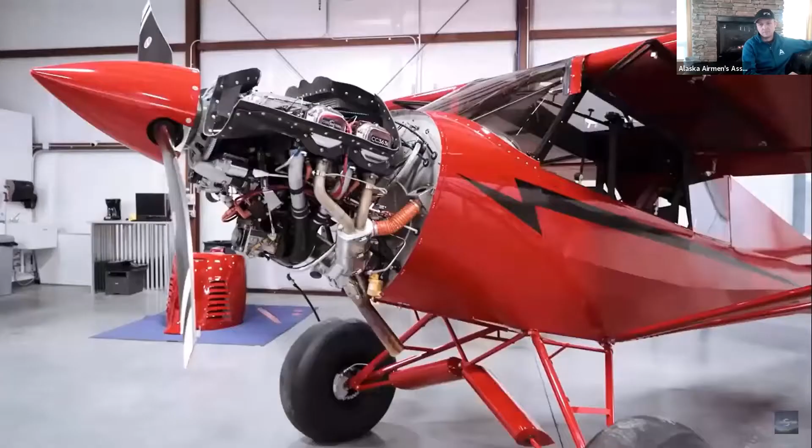The FX3 really takes the best of the Carbon Cub and the best of the X Cub and kind of meets in the middle. Faster than a Carbon Cub, more off-airport STOL capability than an X Cub. My estimation, the EX3 FX3 is probably the best airplane Cub Crafters has ever built. You have an engine that puts out more thrust, a constant speed propeller which allows you to climb the airplane really hard. The Hartzell Trailblazer propeller allows you to manage the engine much better than a fixed pitch propeller would. You can turn up to 2,700 RPM on takeoff, getting full rated horsepower, turn the RPMs down in cruise for better efficiency and quieter cruise.

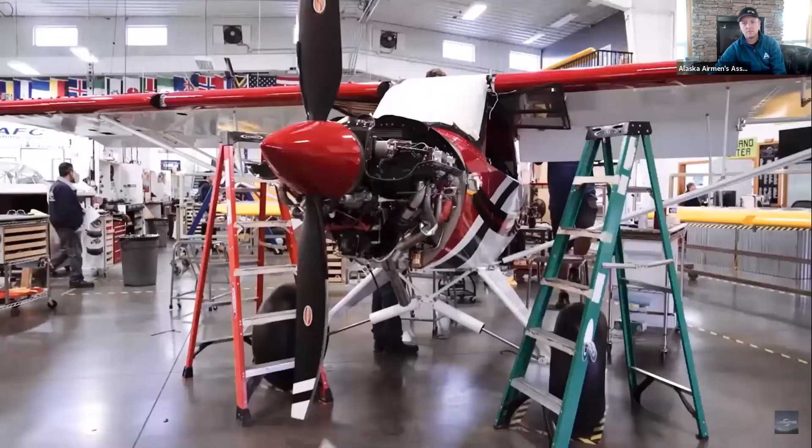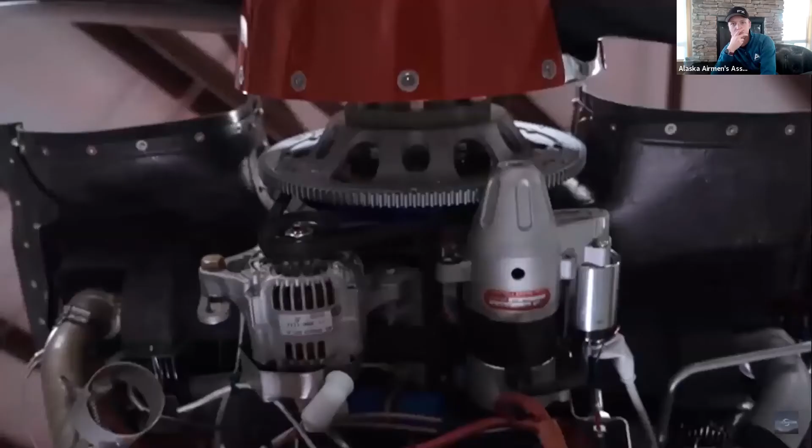The engine needed to be capable of not only supporting the constant speed prop, but we also wanted to take the technology improvements that were available in our third generation. We worked with Precision Airmotive on the fuel injection system, electronic ignition. We worked with the folks at Lightspeed. We also developed our own proprietary cold air induction system. We built a carbon fiber plenum intake. We designed in SolidWorks, and through the flow testing, we could get it to where it flowed equal amounts into all four cylinders. Comes back to the state-of-the-art components that we're building to put in this airplane that makes it better than other aircraft.

The first flight I had with that 363i engine was quite eye-opening. The acceleration made quite an impression. The control response for the FX3 and EX3 is considerably lighter. The stick on the FX3 I prefer over the FX2. I think the pistol grip that comes with FX3 is a real improvement. Weight and weight savings was important through the design process, and every part of the airplane was looked at. The fuselage, the wings, the tail, all of the major structure was analyzed for the higher speed ratios because the airplane performs at a higher speed.

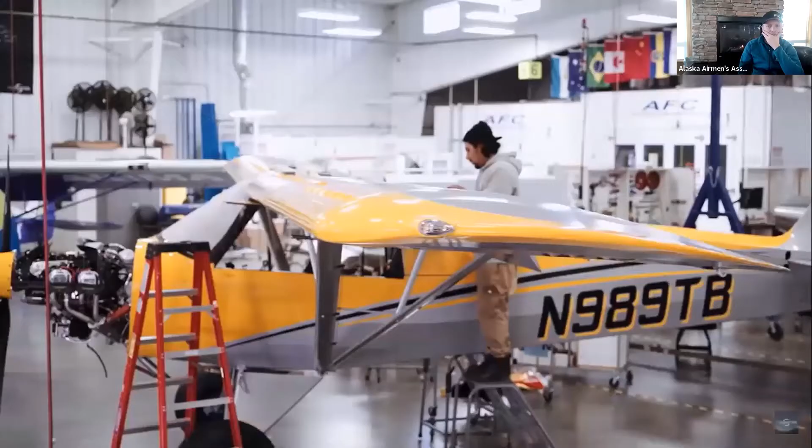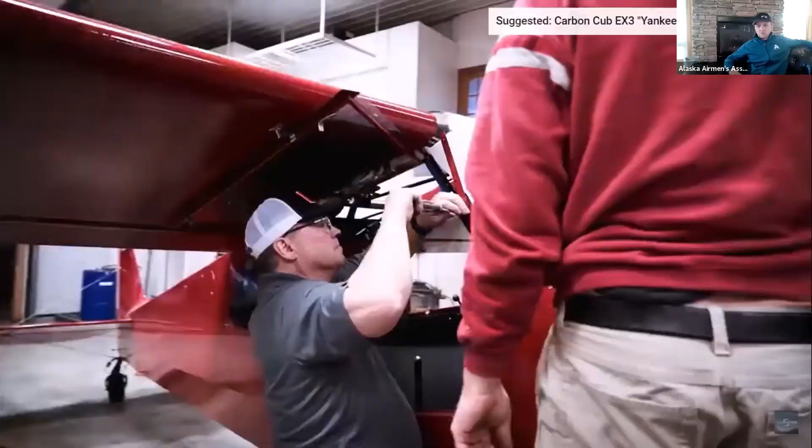So we have an impressive capability to carry 900 plus pounds with an aircraft that has the highest thrust to weight in its class, which brings absolutely exhilarating performance. The FX3 and the EX3 are identical aircraft. The difference is that the EX3 kit is built 100% by the customer. The FX3 is a builder assist aircraft.

All of the Carbon Cubs are very docile in the stall. In my mind, they're just an honest aircraft. The Carbon Cub FX3 is my favorite airplane that Cub Crafters makes. Best all-around speed and STOL capabilities of any model that we make. Okay, a couple of videos here to showcase the FX3 in action.

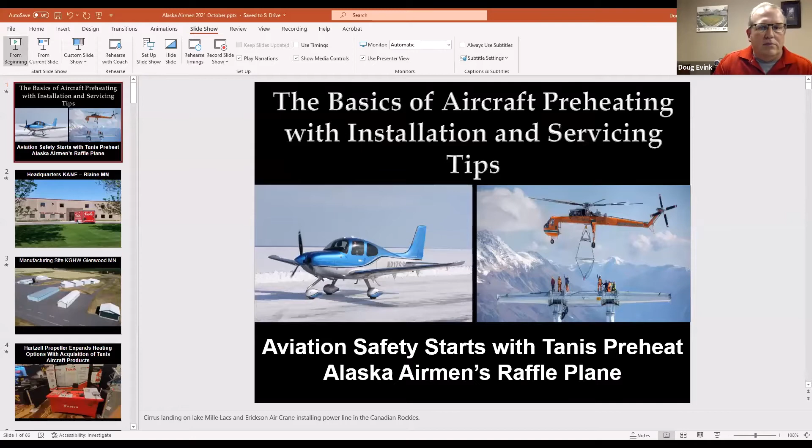So the basics of aircraft preheating, along with some of the installation and servicing tips. The Cirrus that you see on the left-hand side of the screen there, that is a lake in the middle of Minnesota called Mille Lacs. After all the ice houses get pulled off when they need to be off at the end of February, a resort and a bunch of volunteers plow a runway. Last year it was a little over a mile long, and we call it Ice Port.

And then on the right-hand side, we not only preheat piston aircraft, but many turbines, tons of helicopters. And this is the Erickson Air-Crane that we fitted with one of our systems, that's actually in Canada, putting in the Trans-Canadian high voltage power line.

So a little bit about Tanis. Tanis Aircraft Products has 2 locations in Minnesota. Welcome from the lower 48, as those up in Alaska always like to say. This is our Blaine location, where our sales, engineering, and accounting really happens. Where the phone rings, this is where the emails get answered.

And our manufacturing facility is in Glenwood, Minnesota, where it's been for going on 30 years. A nice little small airport over there that if you get the chance, stop on by. We always have goodies to give people that walk in through the AD building in Glenwood, Minnesota.

Most recently, if you haven't heard or seen via the press releases, as of July 1st of 2021, Tanis Aircraft Products is now part of the Hartzell Heated Products family of brands. Hartzell Propeller purchased Tanis on July 1st. And along with that, we became part of the Hartzell brand of companies. And you may not have heard of Tailwind Technologies, but that's the holding company. Hartzell Propeller, a company over 100 years old.

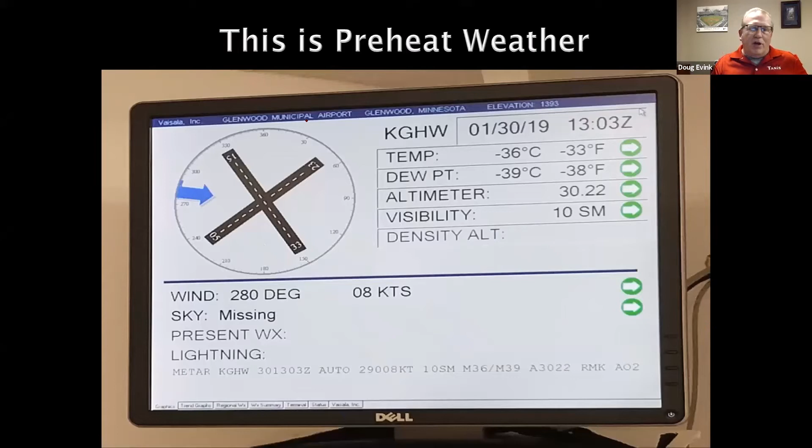This is the picture of our weather station in Glenwood, Minnesota back in 2019, minus 36 degrees. Good news, the dew point at minus 39, at least there's not much humidity in the air, but we call that Tanis preheat weather. And truthfully, what we really want to convey to you, whether you have a Tanis preheat or any type of preheating system, is why are we talking to you about preheating? And of course, Alaska is really in the middle of our strike zone when it comes to customers that need our product. We do it to reduce the engine wear, increase the engine life.

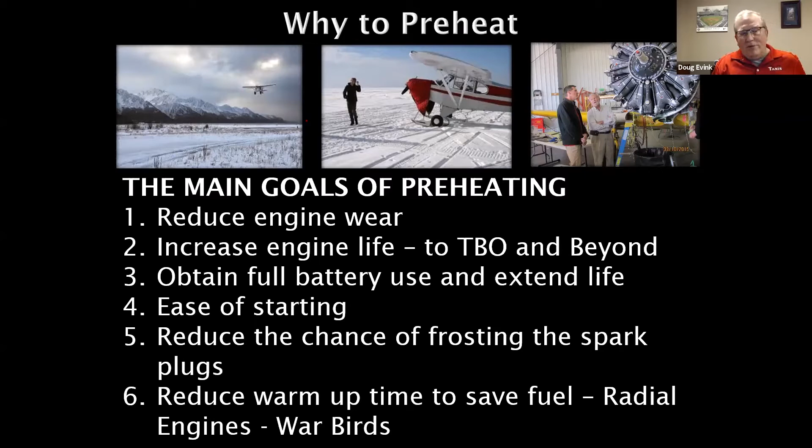Many batteries now are not forward of the firewall, they're after the firewall. So we have battery heating that heats up that battery. You want to be able to start it. You want to make sure if you're in a flight school and you got a new pilot that hasn't really figured out how to start it in colder weather, you don't take that chance of frosting the spark plugs. And we even see a ton of use of our product in open cockpit and warbirds because of all the oil that's in there that has to get up to temp prior to flight.

Prevents cylinder scoring. As we know, there's a taper in the cylinder, and the dissimilar metals of the air-cooled aircraft engine expand at very different rates. And just because you have oil pressure doesn't mean you have oil flow. So that's another reason why you want to preheat. And we recommend preheating all the critical driveline components, if you heard Brad talking about a constant speed prop and accessories that might be involved with that. It truly does increase safety, and that's why Tanis' tagline is aviation safety starts with Tanis Preheat.

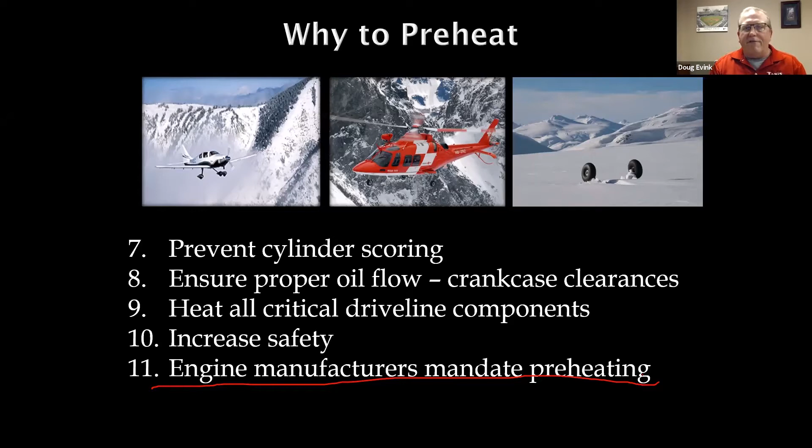And last but not least, the engine manufacturers do actually mandate preheating at certain temperatures. If you look at Lycoming or Continental's handbook, they go at it a little bit differently, but if your engine is at 20 degrees F, in that 20-degree area, they say you must preheat prior to starting that aircraft. So this is Tanis related.

What are our goals when we design a preheat system for an aircraft engine or an airframe that we've never dealt with before? First and foremost, we want to make sure that we're able to heat those cylinders. It's a multi-point preheat system. We want to be able to heat the cylinders at least 50 degrees above the ambient and produce an oil temperature at least 40 degrees above the ambient. But when you're externally warming up your oil, you don't want to have it exceed 120 degrees Fahrenheit. And never do we want to have it warmer than the cylinder.

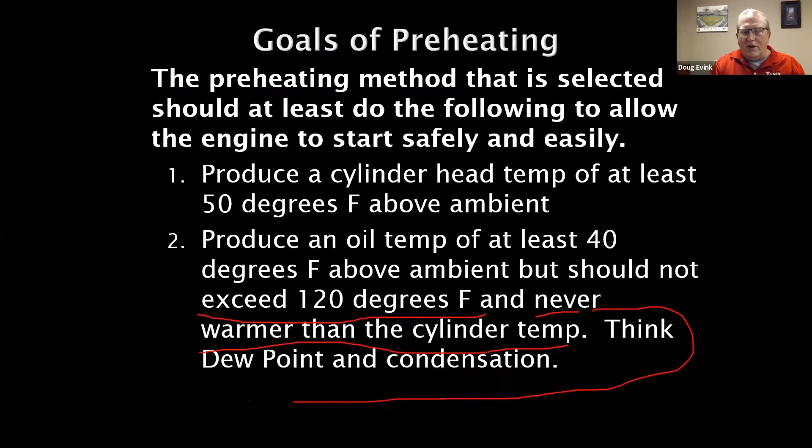And I'm going to jump into a little physics here about the dew point and condensation. So we have a caution, here comes physics. But if you think about your oil sump, when you're done flying, that crankcase is full of moisture. It's almost 100% relative humidity and probably close to 180 degrees. That moisture will all condense, sit on your oil, eventually go down to the bottom. That water will evaporate due to just the normal physics around it.

But as you increase the delta between the temperature of your oil or the water and the dew point inside your aircraft crankcase, that rate of evaporation will speed up. And that's the critical part.

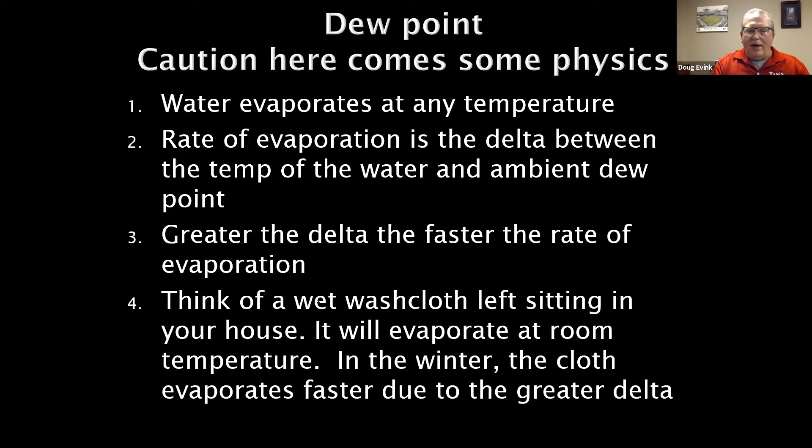You know, think of if you're in Alaska or even Minnesota, you leave a wet washcloth sit out in the summertime, high dew points, it stays wet for a day or two. In the wintertime, when we're heating and the dew point and the humidity in our house drops quite a bit, it is dry in no time. And that's that evaporation rate that speeds up.

So we have a multi-point preheat system that heats everything above the oil line warmer than the oil. So whether you have 4 quarts or 7 quarts or anywhere in between there of oil, we want to make sure everything above that is warmer than the oil, which of course is also the water and the moisture that's entwined with your oil. And that is a physical constant. You cannot condense moisture on a piece of metal that is warmer than the dew point.

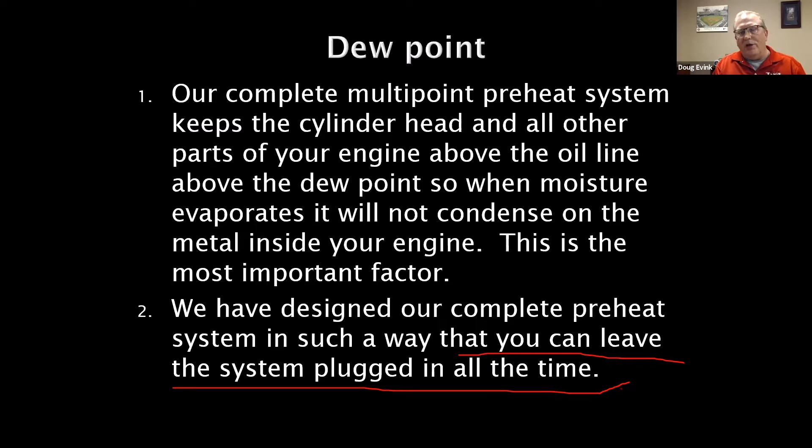And that's really the reason why you can leave our system plugged in all the time. And we'll talk about it as we go through the next 45 minutes here in the presentation, what you should or should not do. But that is the meat of what our presentation really wants to do. Why should you preheat, what you should preheat, and why it's so important you think about that temperature of the engine.

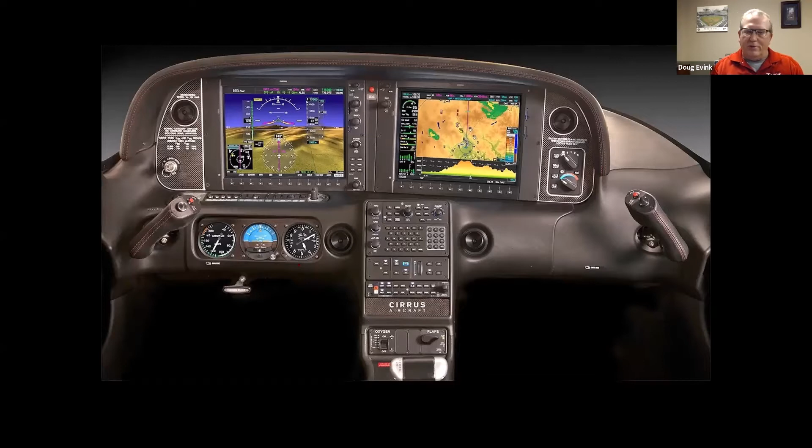The minute you slip that master on, you're going to be able to tell what your CHT temperatures are and what your oil temperature is. So you can see that delta, and you can also see, hey, do I want to start this engine now when my oil is this temperature or when my cylinders are this temperature?

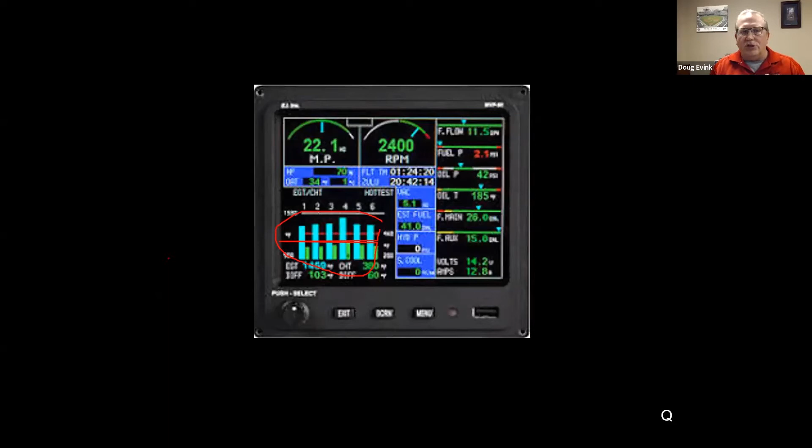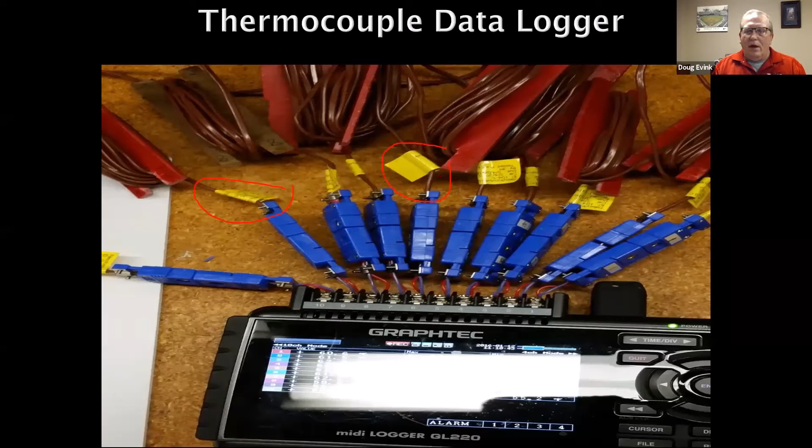I give you that information because what we want to prove to you is we are gathering this data all the time. This is our NIST calibrated data logger that we use to capture temperatures of various engines. You see these are the calibration labels on each one of these items. And we actually physically go out to customers' aircraft and do these tests. So this is a customer that we went to.

It was a flying club with several different aircraft, and we did a mapping by taking those thermocouples, you see these brown wires here, and embedding them up against the outside of the cylinder, opposite of where we're heating the cylinder, putting ones on the case inside the oil. So the bunch of 100-mile-an-hour tape you see there, that's one that has our thermocouple sitting inside of the oil so we can get the oil temperature. And then we'll also do the ambient temperature at the same time.

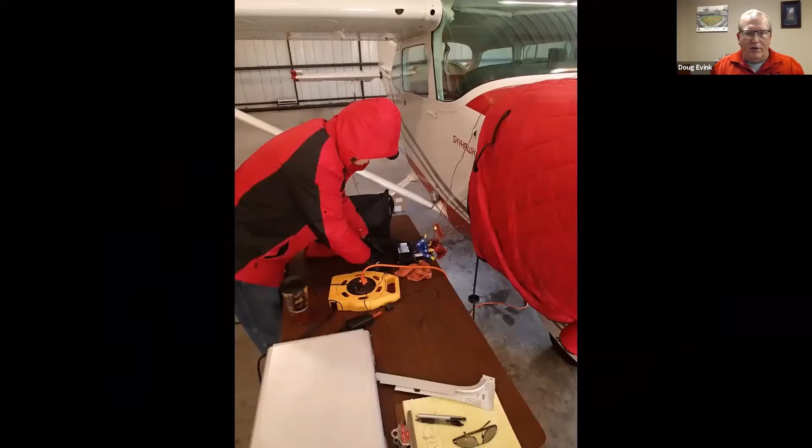And yeah, it's in a hangar and it's cold. I don't remember what the temp is here, but we do it with engine covers on, engine covers off, cowl plugs in, cowl plugs out, always gathering this data so that you too can actually see how we're gathering that data, and you can prove this out yourself. You can actually take a look at it and say, here's how it's happening.

So here, let's jump into some of this data. This should be near and dear to one of the people that are on this webinar tonight. This is an FX3 that resides in the metropolitan area, the Twin Cities of Minnesota. Got a kit put on. Oh, I don't have the date on here, so Trent, you'll have to chime that in.

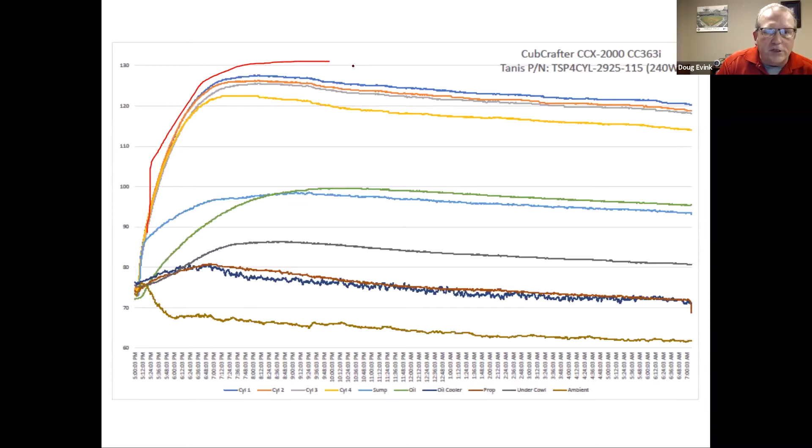But you'll see what we're talking about. We want all 4 of these cylinders to be warmer than the oil, and the oil is the green line right here. So this is the oil, and of course, it's going to take longer to heat up the oil than the cylinders because it's got more mass. And we really want to see this delta every time.

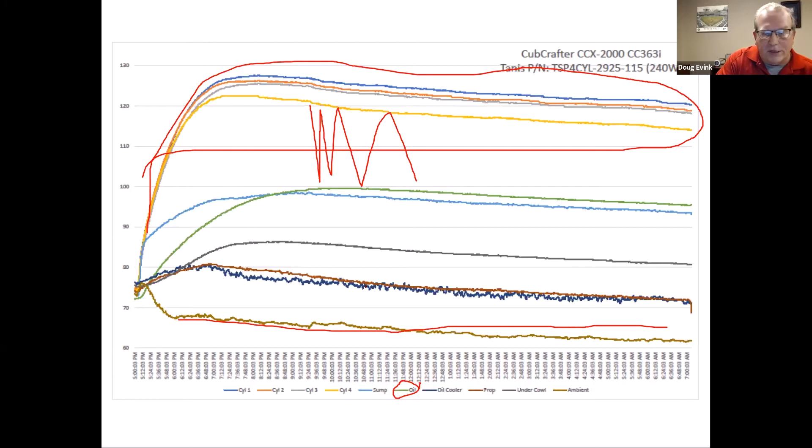And we want to make sure the temperature is in a range that we feel comfortable to start the aircraft. And if you see here, we're starting this with ambient temperature in the 60s. So yeah, you can preheat in the 60s. The oil temp isn't above that 120 where we don't want to see it. But that is how we gather and capture data on customers' aircraft.

We'll talk a little bit more about what if it is 20 below zero and you need that extra heat. So that's the other reason you don't want to put a timer on it or a thermostat inside your hangar that says, hey, every time it gets into freezing, I start preheating, and then once it gets above freezing, it shuts off. Because what's going to happen is our cylinders, so you see right here at the 1.5 hour mark, we get 50 degrees above ambient in that first 1.5 hours.

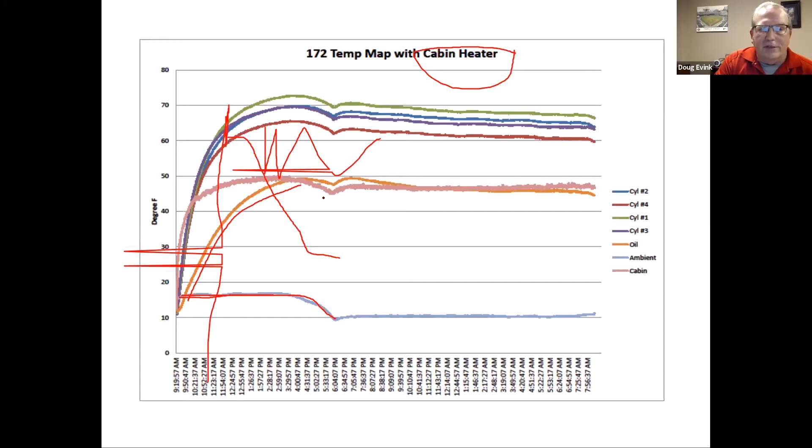But if we were to unplug it, those cylinders are going to be the first ones to cool off because they have less mass, and the oil is going to stay warmer than that. And now you set yourself up again for a condensation possibility. Again, not a concern if in fact you're going to fly it right away, but if it sits there for many, many days, now you have an issue of condensation on a rocker cover to start with, valve, top of my cylinder, cylinder walls, and then starts the issue.

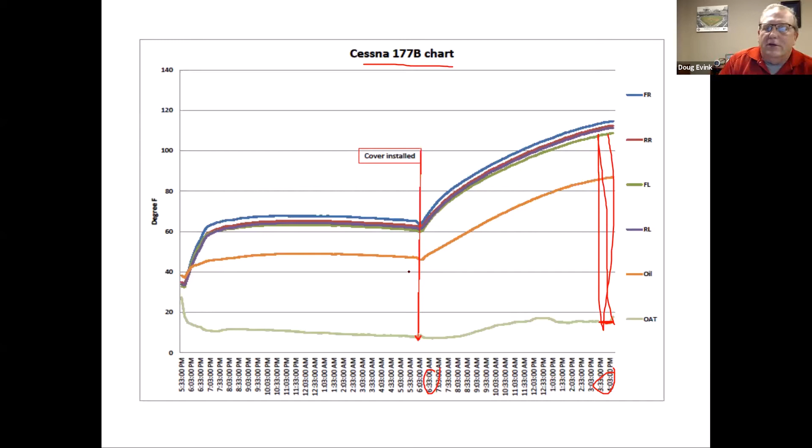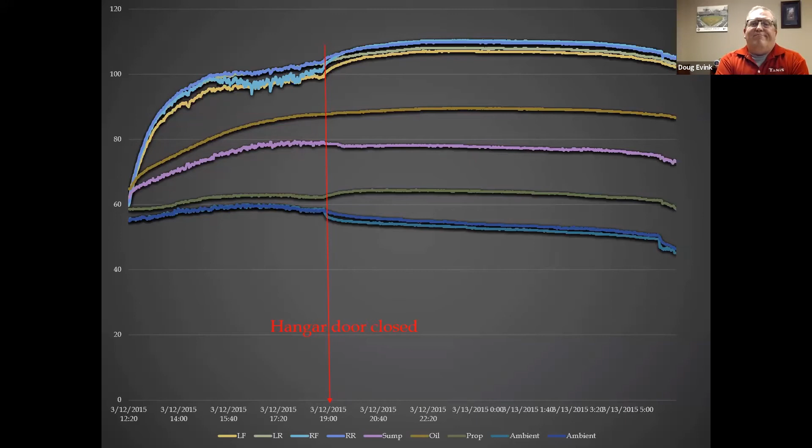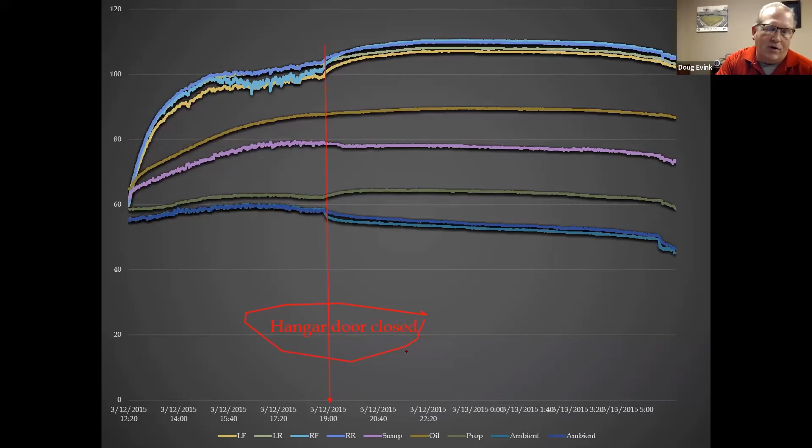And sometimes you're doing a data log on something and you bring the data back into the office and you look at it and you say, what the heck is going on here? Of course, it didn't get printed out when we looked at it with this on the side of it. This was a flight school that tucks in about 10 aircraft every night, big hangar door. And they tucked this one in. We started the data logging at 12:20. And then at about 7 o'clock that night, the hangar door goes closed.

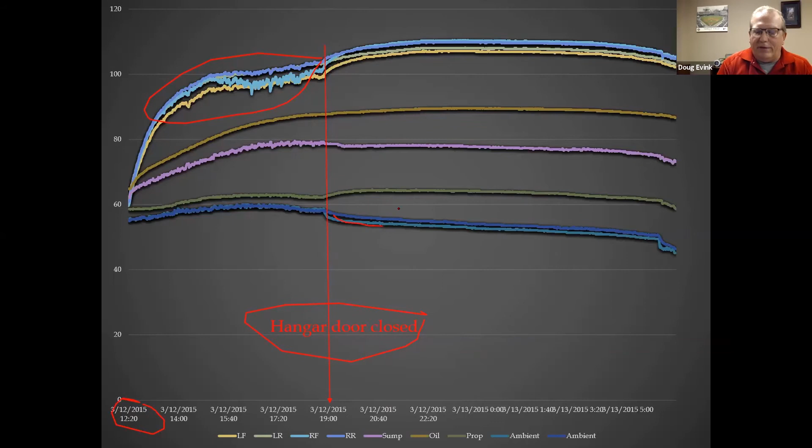And that little up and down temperature of the cylinder is just the natural airflow going in and out of the cowl openings. There weren't any cowl plugs, wasn't any insulated engine cover on this one. We just left it wide open. And this shows you, A, how effective our air-cooled baffles are on our cylinders, but B, how important a set of cowl plugs or an insulated engine cover is for our engine to gain and maintain that temperature. It is really, really important. If you see how much those cylinders bounced up and down, even as the temperature dropped later on that night, we got more heat going through that aircraft.

We will test any type of scenario. We had a customer that said, "Hey, Doug, we don't use your system, but we use your insulated engine cover, and we have a sump only, and eventually everything's going to be the same temperature because we got an insulated engine cover on that."

So we said, well, let's go prove that out. Let's see what happens with that. So we started with the Citabria. It was 20 degrees Fahrenheit, and we plugged it in with that insulated engine cover on and left it on from 9 a.m. one morning to the next afternoon.

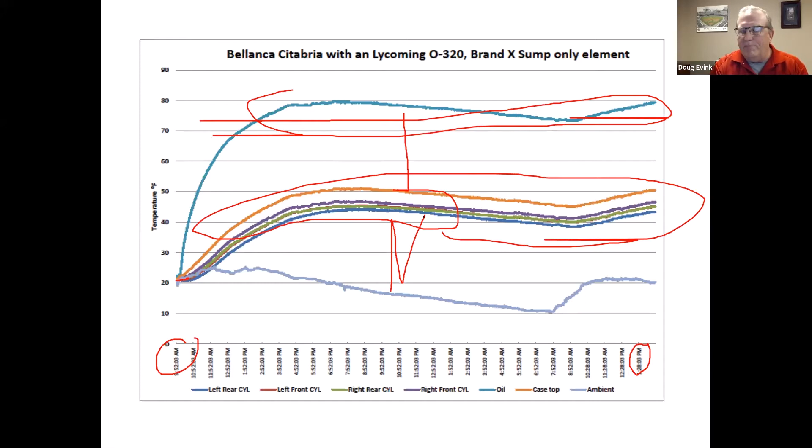And you will see that whole period of time, this is my cylinders here, and this is my oil temp. And that is basically proving to you that a sump only will heat up the oil, will do a fair job of heating up the cylinders, but you're still setting yourself up for an issue. Again, not a concern as long as you flew somewhere after this time here.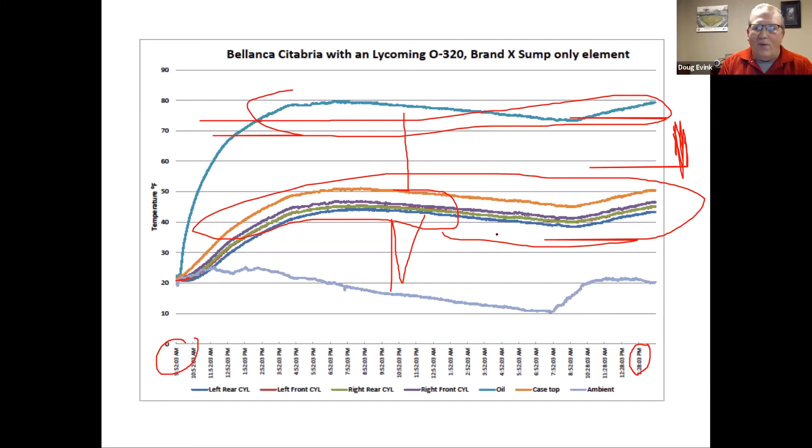But let's say it got fogged in and all of a sudden you couldn't fly. Now what are you going to do? Are you going to be able to fly within the next week? Well, that moisture is sitting on top of your cylinders.

Their aircraft maintenance facility took the sump only engine system off, put ours on, and again, here's the part that we're talking about. The ramp up is so quick. Here, this is 9 o'clock, and right here is 2 hours later. I'm terrible at drawing on the screen, but we get that 50 degrees ramp up in a couple hours. It happens very quickly.

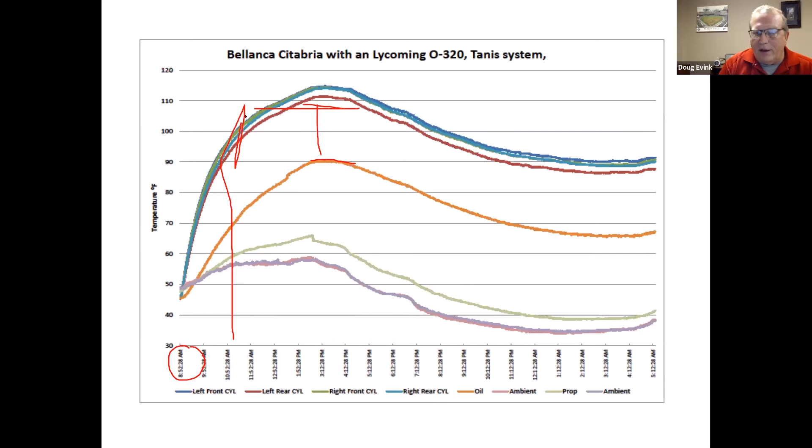And we even go out to places not necessarily close to us. This gentleman lives in Wasilla, Alaska, and had a 6-cylinder UL Power Zenith going together. And we hadn't developed a system for the 6-cylinder UL Power. So during the Airmen's meeting in May of this past year, I stopped on by. We did a data log of his aircraft and determined what we needed to do for wattage and type of heating for his aircraft.

So I'm going to stop right there, Will, and I see there's a couple questions in the chat. Is there anything else that anybody has for questions at this time? If not, we can just roll right on by.

Okay, the first question I see here from Arn: is there a way for the winner of the airplane to get a repairman certificate? Arn, forgive my ignorance here. What is a repairman certificate? Brad, you want to take that question? I can take that question. Okay.

So an amateur builder can qualify for a repairman certificate, which allows them to do annual inspections on their airplanes. For airplanes in the LSA class, like a first generation Carbon Cub, that's a 16-hour course that a person takes. They have to pass a test at the end of it that's blessed by the FAA, and they get what's called a repairman certificate.

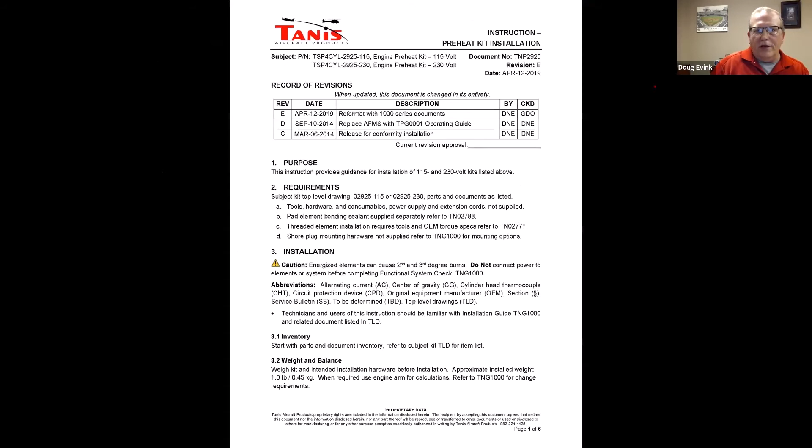And that is this area on our website right here under document search. You go in that upper right-hand corner. Type in the document you want. You'll be able to download it. Here's a case of our installation instructions for our 4-cylinder kit, where we go through and tell you various things on how to install it.

One thing that this Carbon Cub will have in the FX3, we also include what we call our circular plug bracket. You'll see this installed on Trent's aircraft here later on. It's a place to house and firmly hold the shore power plug so you can plug it in with one hand, because normally in Alaska at least, you have an insulated engine cover sitting on there, and you have an oil door that you're popping open, and you have an extension cord in the other hand, and you kind of need that third hand. This really helps make that an easy install.

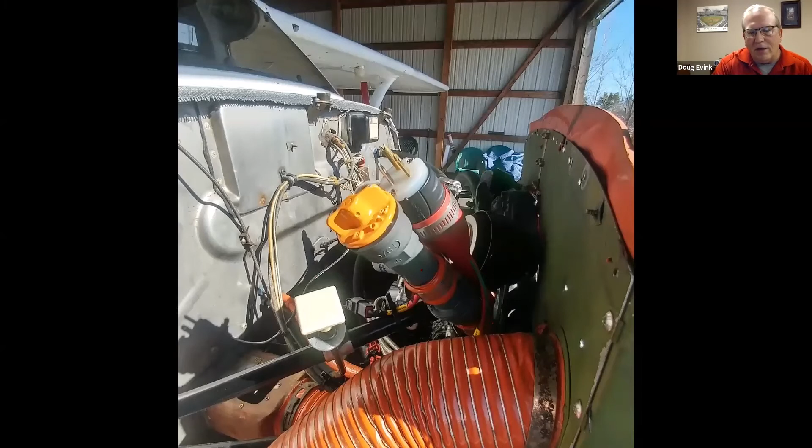So if you see here on this FX3, you will see that it is mounted on the oil fill tube with self-fusing tape and hose clamps. The hose clamp goes around the plug, and then you have that plug permanently mounted in one place of the aircraft. And here's what it looks like with the cowl back on.

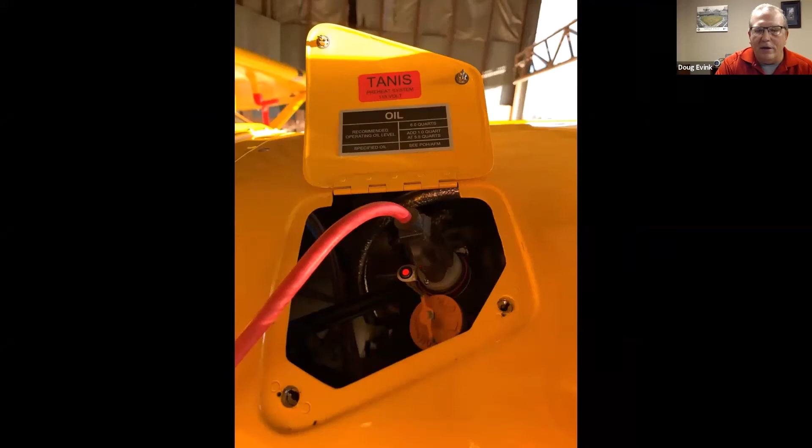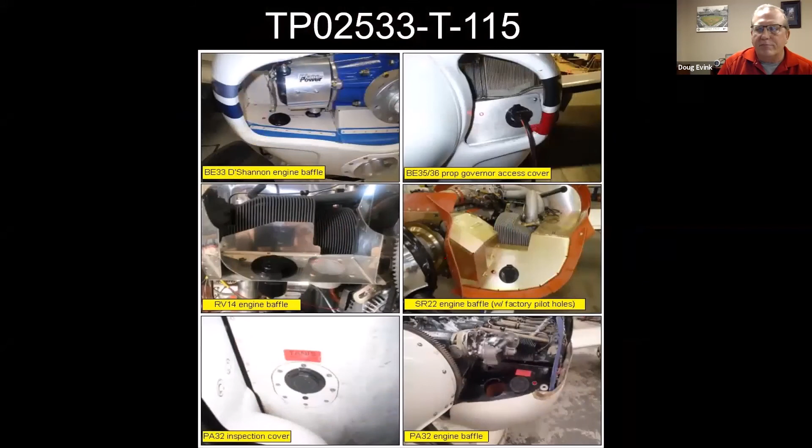We also include an indicator light. So when you do get this plugged in, you literally have the ability to know that the power is coming through your cord into the system and the fuses are not blown, because otherwise that light would not illuminate. So we do have various types of plug mounts.

People a lot of times will ask our employees at our trade show, what's the #1 fail point? The #1 fail point is if you don't firmly mount your shore power plug and it bounces around, whether it's our system or anyone else's. It moves around. That's an electrical wire. You bend an electrical wire enough times, it's going to break.

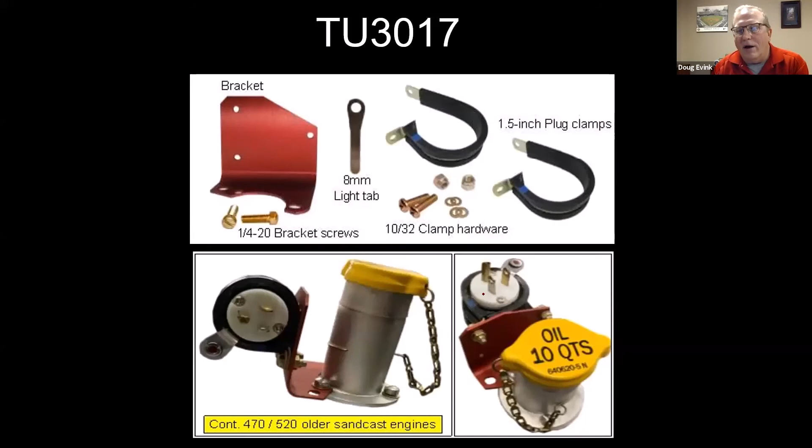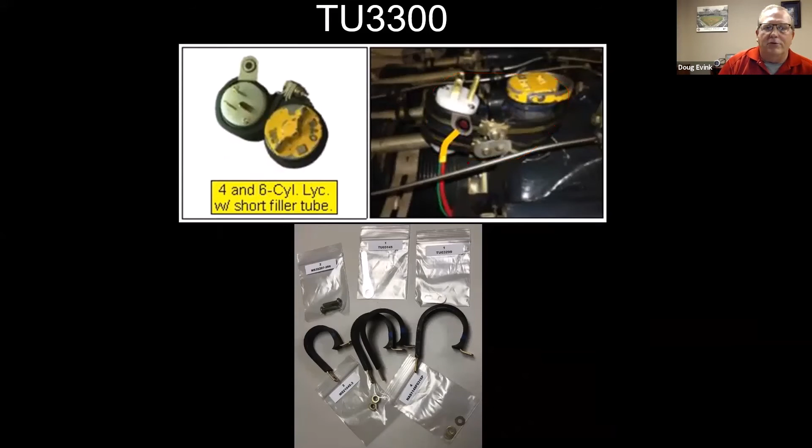So you see our flush mount plug that we have here. If you are a person that has a Bonanza or a Cirrus, you'll see that it will be a real nice install with a flush mount plug. Or we have brackets to go on to the Continental with the Sandcast, or push and clamp arrangements so that you can firmly adhere a power plug to an area so that it doesn't bounce around. And yes, that is how big the power plug is, because we want to be able to mount something directly on that. We also have door kits.

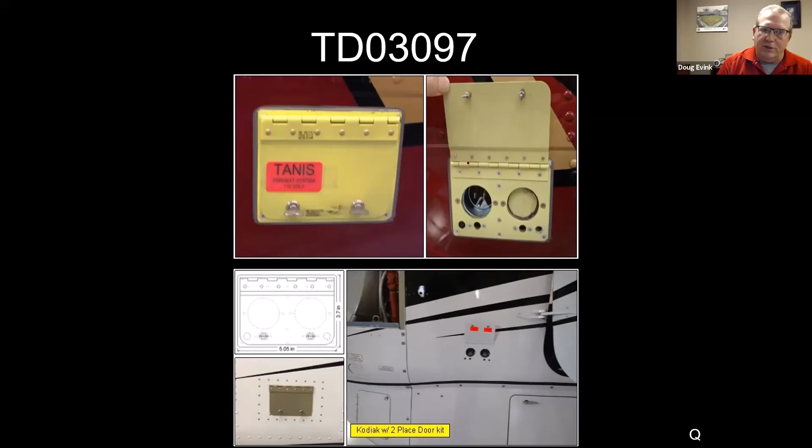Obviously, we're on a bunch of helicopters. We will then have single place, double place, 3-place, and even all the way up to 4-place door kits that can be mounted onto the aircraft. Last 2 years, the raffle plane had either a flush mount plug or a single place door kit on the side of that 180 that was in the boot cowl. So you can just go up to the side of it and plug it in.

And so as I'm going through some of the installation tips, one of the things, if you are working on this yourself, this wonderful little slotted 1/2-inch socket that we sell for probably cheaper than you can try to make your own. I think it's $15 or $16. That works so good at installing these 1/4 by 20 bolts. We replace a rocker cover bolt or an intake tube.

We used to be in the CHT well. We vacated that a couple decades ago with the advent of engine monitors. But that item right there makes it so easy to do the install of the threaded elements. And we'll show you here later on what happens on the pad elements.

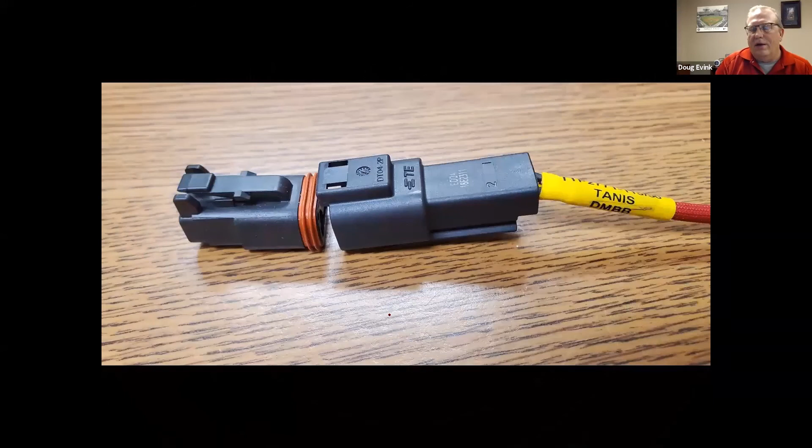Back in 2010, we went to this type of connector for everything. It's the TE Deutsch environmentally sealed connectors. So if you have male and female spade connectors on your old system, we're going to try to encourage you, if you're buying a new element, to go to our current kit, and then we will sell you a connector kit that you will cut off the old spade connector on your harness and have something that you can plug

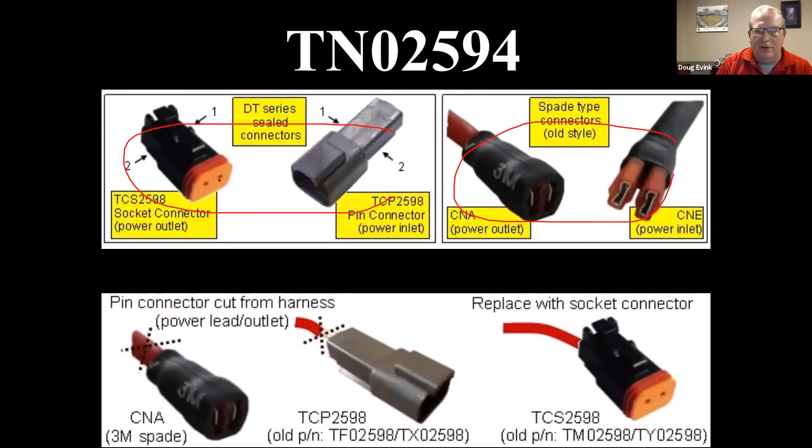it in and out. But of course, in the 70s, the male and female spade connectors were high tech at that time. And that's what the connectors look like. And we'll give you an instruction on how to remove these and install these. And then you'll see we call them sockets and pins based on what's inside of that connector. So install.

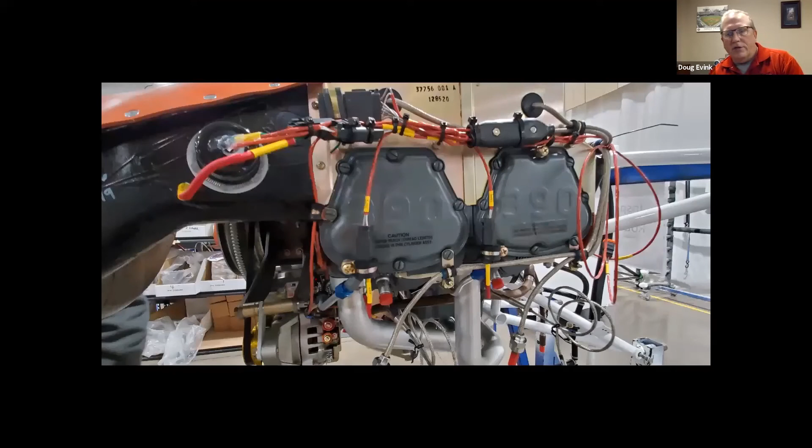This is Trent's FX3. We worked with him to do the install on the intake tube location. This is on the co-pilot side of the engine. Replaces that intake tube, and that will be one in each cylinder. Now here's an example of what the SR20 looks like in the factory at Duluth for the Cirrus. Again, they use that intake tube location.

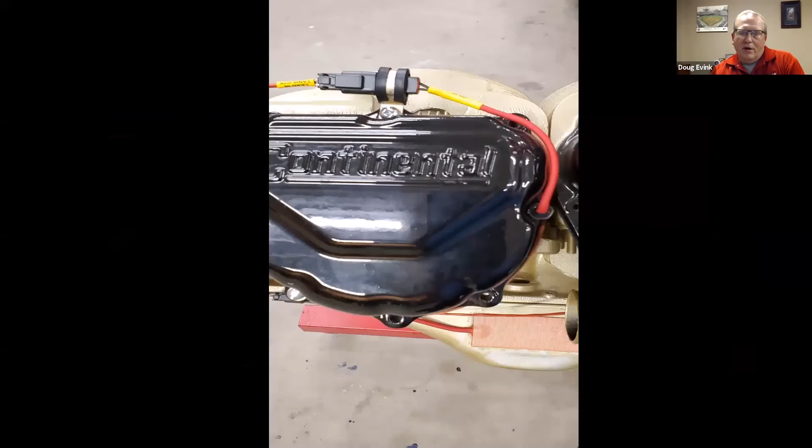The exact same fastener will replace any one of your rocker cover fasteners. So depending on your airframe, your engine, really depends on where to do that type of install. This is the SR22. Just about every aircraft that has any type of, I think it's flight into known ice option, they will have our system installed at the factory.

Hey, Will, you got a question? Yeah, we've got one here in the chat. MSS iPad Pro says, I rent a hangar and would like to know how to estimate the cost of running the Tanis on my C-180 O-470. Electricity is included in rent, but I don't want to take advantage of the landlord. I fly weekly from South Central Wisconsin. Thanks. What's the engine? Cessna 180 with an O-470.

Yeah, so you're going to have 460 watts is going to be the power consumption. So every 2 hours, you're going to use not quite a kilowatt. So if you're paying Wisconsin, I'm going to guess you're somewhere around 15 cents a kilowatt. So take 12 times 15 cents, that's your cost per day to run that preheat system.

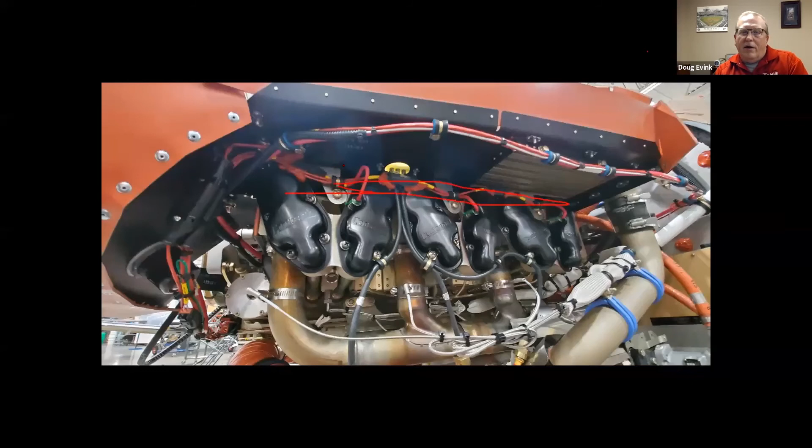One other thing that I did want to mention, you'll see running the wire. We include a wiring harness, and what we really want to make sure is this wire per the guidelines has to be secured every 6 inches. And you'll see what they do at Cirrus at the factory. They run it right up along the side of the top of the engine, and they have cushion clamps that hold every one of those very solidly.

Our 4-cylinder is going to have one pad that's glued to the bottom of the sump. A 6-cylinder needs a little bit more heat because it's got more weight, and the top of the case is bigger. So you'll have a pad on the bottom of the sump and a pad on top of the case. And here's just a brief way of showing you how to do the install. That's what the pad looks like. That's the bottom side of the pad.

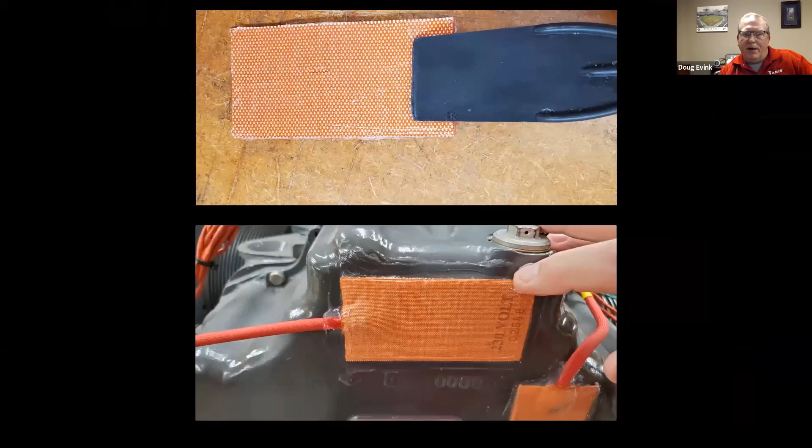It comes with a tube of bonding adhesive, which is basically Dow Corning 732 clear. You go ahead and put that on the bottom of the pad, take a putty knife, make it a nice thin film all the way across so you can see that it's all wet. You adhere it to the bottom of your sump, and it'll take anywhere from 6 to 8 hours to cure. So it's a moisture cure, humidity cure type of adhesive.

And then what we also recommend is once it's done that overnight, then take silicone and go around the perimeter of that pad so that you have kind of an extra bead to go around the side of it so you don't have oil or any other product getting underneath it or wanting to stick to that pad. There again is that Cirrus, the factory in Duluth.

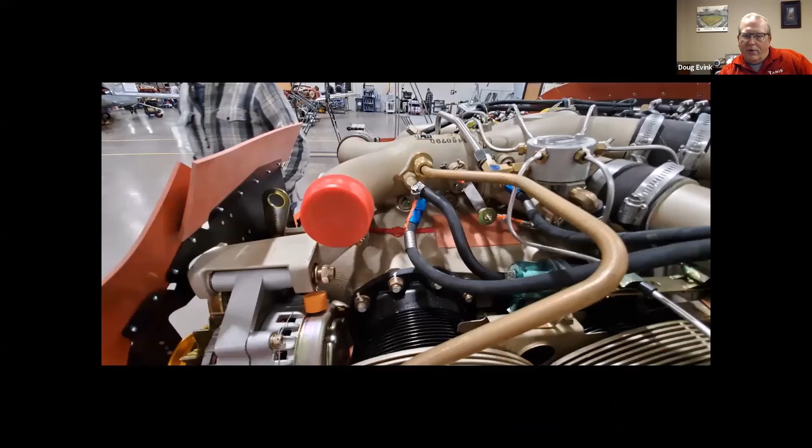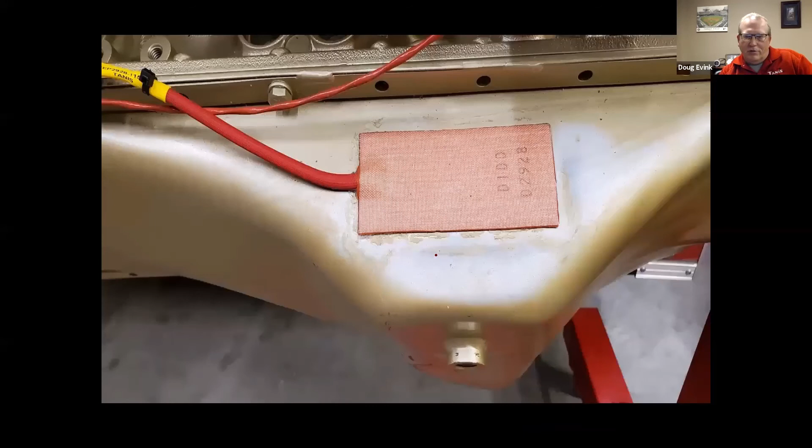When I said a 6-cylinder, you're going to have one on top of the case and one on the, well, that's not their sump, but that's a sump. That's our traveling trade show sump. And that's the Cirrus SR22 with a Continental on the bottom of the sump. Here again is the FX3.

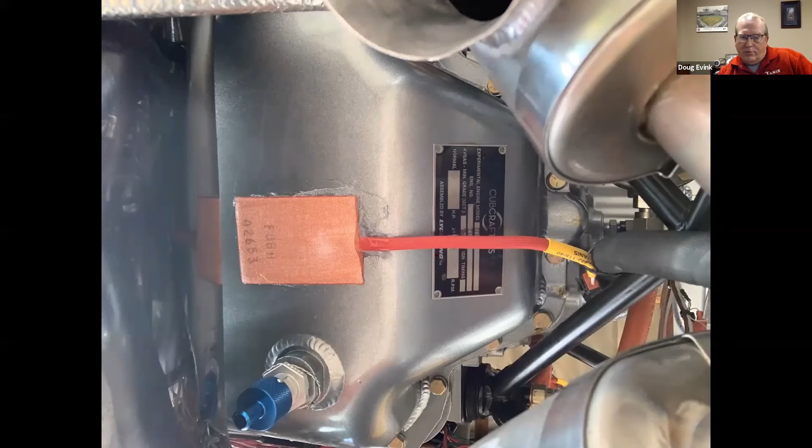The 4-cylinder pad is a little bit smaller. Again, we do it based on the weight and the amount of wattage that we want to put into the sump, and that is just a great place to put on that FX3.

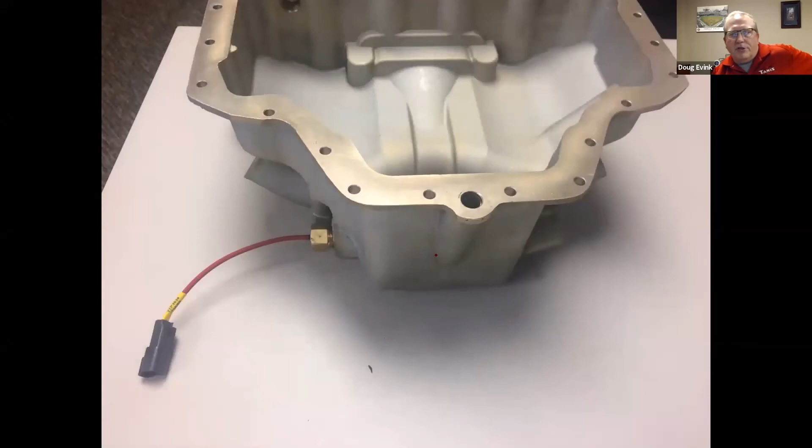We also have, for some places that have the cross flow type of sump, what we call oil sump screen elements or sump elements, where it's just a brass body, and then you'll take a plug out or the oil sump screen and replace it with our element.

And the reason people go that route is they will actually time out an engine quite regularly in a flight school. And if you put that silicone pad on really good, it's really hard to get off. But if you use a plastic putty knife, heat it up a little bit, you're able to get that pad off, but they're like, no, let me just unscrew it and screw it back in, which you can do with our intake tube or rocker cover locations.

So I can see when people just go up there, let me look at the chat. Okay, we already answered that question. Did you see anything else come in, Bill? No, I didn't. Anybody else have a question? All right, if you have one, just pop it into the chat and then we'll open up the end.

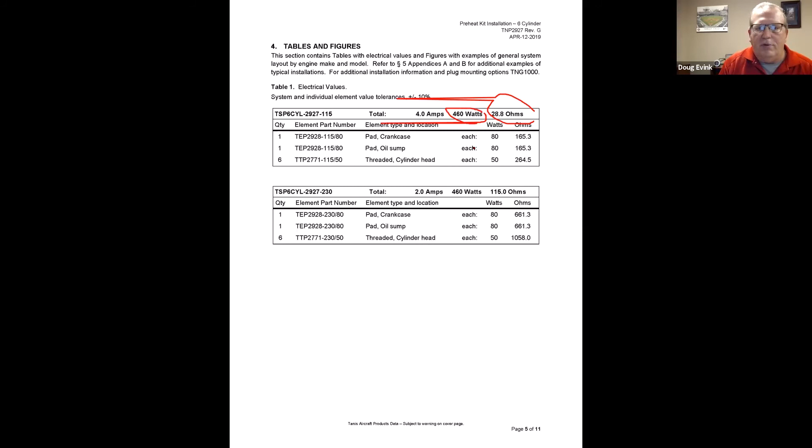So basically the question should be stated, how do I know my Tanis preheat system is working? And this can go for probably just about anybody's. Once you know what your total wattage is or your total ohm value for the kit when it's installed brand new, then you can do some really simple things to determine. That's our 6-cylinder kit. Remember, our 6-cylinder kit's 460 watts, and our 4-cylinder kit is 240 watts, 55 ohms for the 4-cylinder and 28.8 ohms. And this is all plus or minus 10%.

But one quick and easy way is to go to your big box retailer or small hardware store in the local town and buy a watt meter. You know that our 4-cylinder system draws 240 watts. Plug that into the outlet that you're plugging it in at. If you're plus or minus 10% of that 240, you know every one of the elements is working. The 6-cylinder, if you're plus or minus 10% of that 460, you know every one of your elements is working. That's really the quickest and easiest way.

Most people will go in and stick their hand on it, and yes, you will get a lasting impression. If you do that on some of our threaded elements, it will rearrange the skin on your hand a little bit. Another way is by an ohm meter. You've seen that our 4-cylinder was 55.1 ohms. Put the ohm meter on the plug, and you know if you have any element out.

If you have higher, much higher, because obviously this is above 10%, you know there's an element out, because the lower the resistance, the more heat you get out of something. Ohm's law formula. So as I raise in resistance, I have elements that are not working, and vice versa. If I see this 0.4 ohms, I know I have a shorted element someplace.

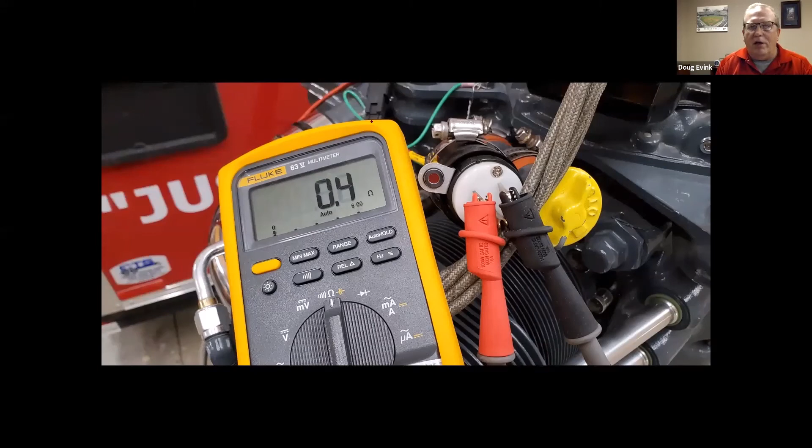So leave the ohm meter on there. Again, these are Deutsch plugs. Unplug them one at a time until you see that ohm meter jump back up to this value, and then you're like, okay, that's the shorted out element. That's the one I got to replace.

I put this on here because we made this change about 5-6 years ago. We always have 2 fuses on all of our wiring harnesses, because our wiring harness doesn't know if it's going to be a 115 volt or 230 volt system until it gets assigned to the elements. So we have 2 ceramic slow blow fuses that are embedded inside of here.

We used to have a 1/4 turn cap type of fuse arrangement that was very easy to pop the fuses out. Unfortunately, it was also very easy to crack the cap on it, and we wanted to make something that was a little bit more waterproof and foolproof from damage. So this is our current fuse arrangement. It'll be within the first 10 inches of the power plug. We had one person calling up and saying, I can't find any fuse. Turn this around.

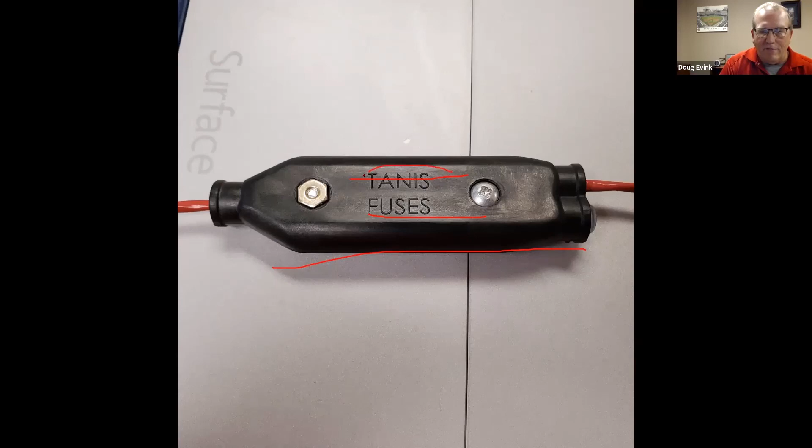I think we do have the injection molding printing Tanis fuses on both sides of that. And as we get out to the end, so we don't only preheat

And now they just go out there with a generator and plug it in, and they don't have to be lugging around and keeping doors open when the snow was blowing in that part of Canada.

A little plug for a product that we just got involved with here a couple of years ago. We bought out a company that was doing texting type of remote starts. And then as we did that, we wanted to bring it up to new technology. Another company came on board from Kansas. We've now partnered with them, and we are making this device called a Switch-on. And basically that is a data controlled device that you can turn on your preheat system.

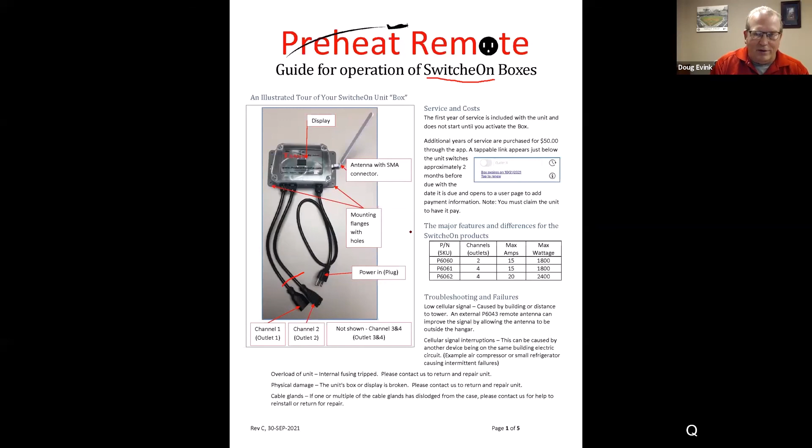And then if you want to come and join us either the first or second weekend in February, we have Winterama in Glenwood, Minnesota, where we cut a nice great big hole in the ice. And no, it's not just 5 feet deep, it's 10 feet deep. And we jump in for a fundraiser for the Waterama, and we invite somebody else to go with yours truly. And we'll have a nice warm place for you to change into your jumping gear, and a nice warm place to change back out of it. And then we also will test your confidence and competence for doing that.